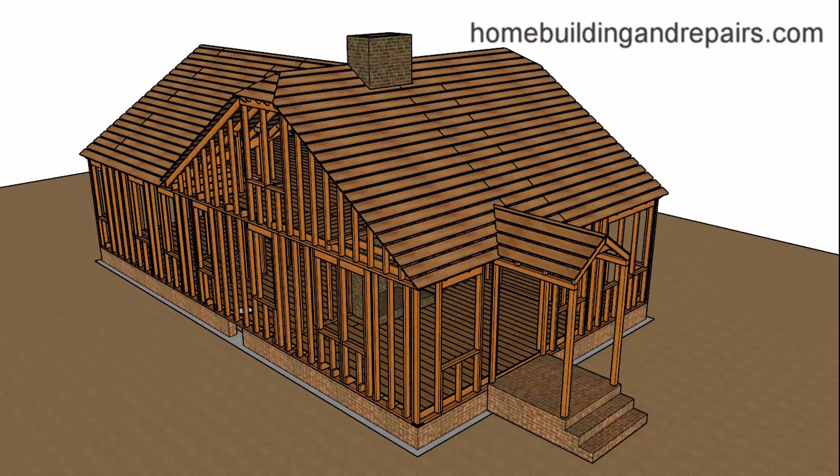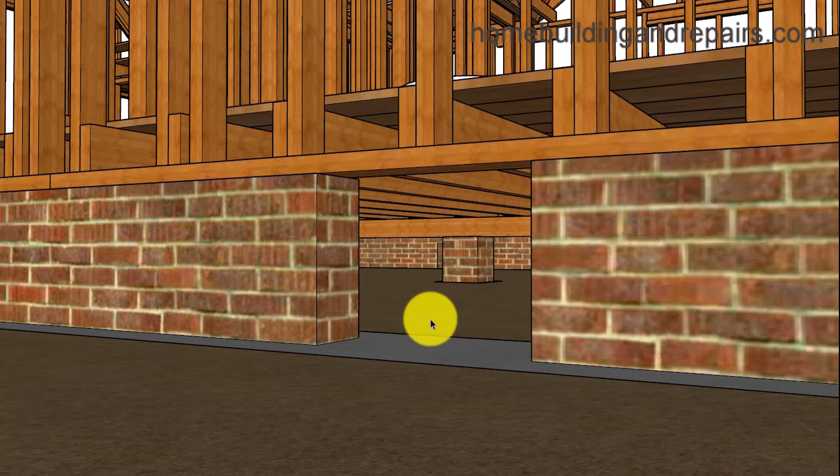In this video, I am going to provide some of you who do not like creepy things, you don't like going underneath your house to make any types of repairs, with a couple of other options that could actually speed up your repairs. However, it will require you to do one of two things to your house. And the first of those will be to install another crawl space access hole. And this might not be easy because you will need to go through the concrete, or you will need to remove the blocks or bricks.

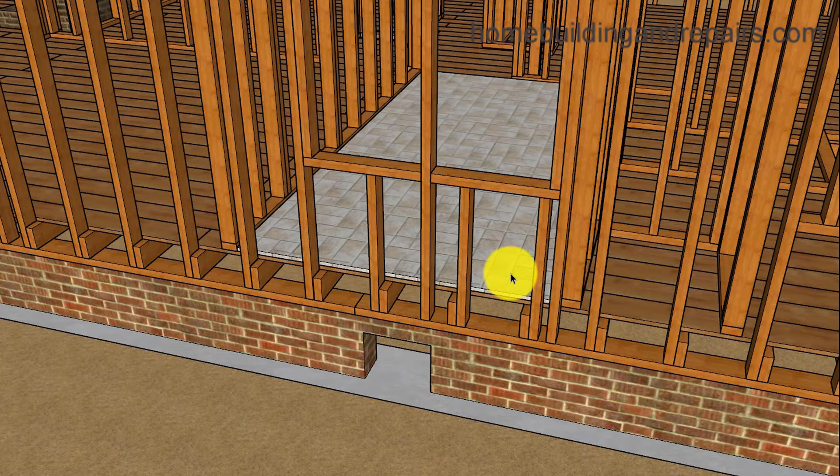So option 1 is not going to be as easy as option 2. However, option 1 might be your only choice if you have some type of flooring, tile, wood floor, anything that you will not be removing. And sometimes you can just pull the carpet up, or even some types of floating wood flooring, so that you can use option number 2, and that would be to cut a hole in the floor sheathing.

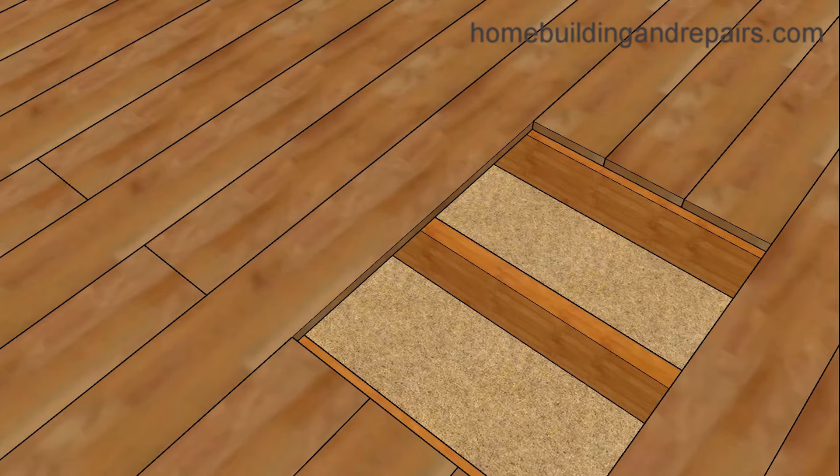And I know for some of you, you're like, I don't want to damage my house. And in some cases, you could actually damage the house if you don't put everything back together correctly. However, most of the time, you're not going to have a problem with that.

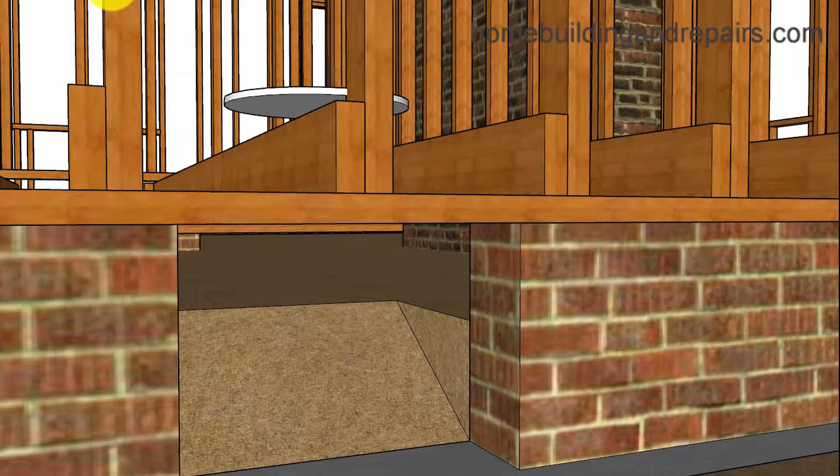Now, the second problem, and the reason why I've ended up doing this before when I needed to make repairs, would be the fact that you just don't have enough room in the crawl space area to get underneath the house or to get underneath the house safely. For example, you might only have a few inches. And of course, cutting a hole in the flooring might be your only option if this is the case.

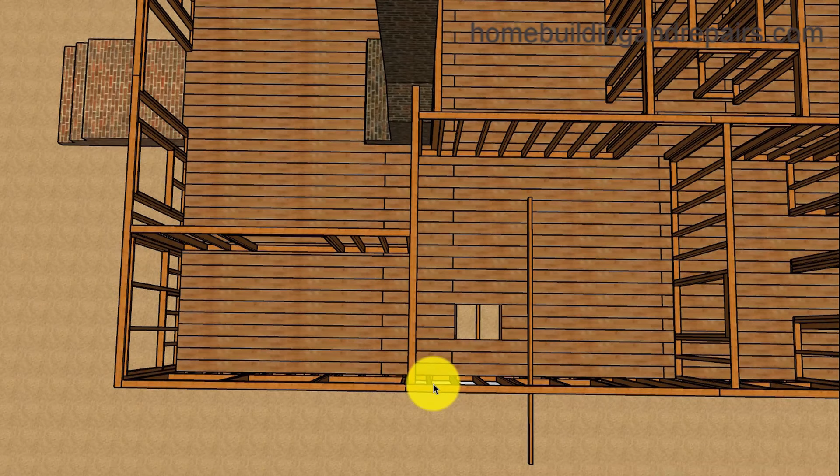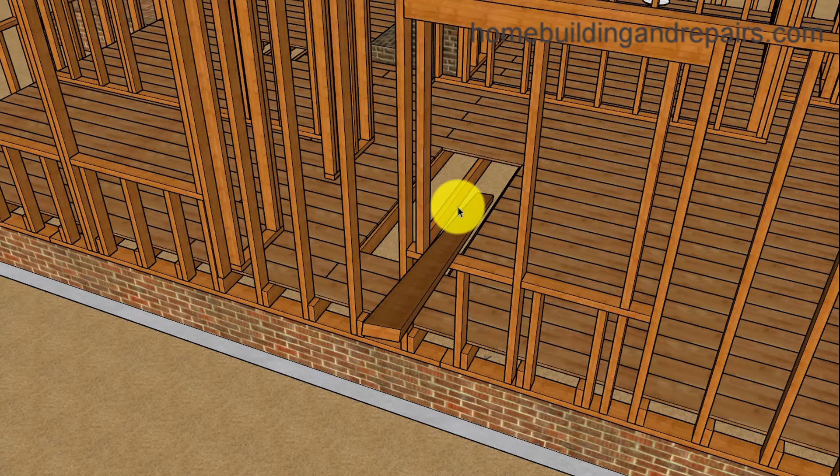So there are a few things that are going to provide you with a reason to cut a hole in a floor or to cut another hole, because you won't be able to get long enough lumber in through the access hole, or you might need to cut multiple holes or remove larger sections of the flooring, which brings us to another reason why you might choose to cut a hole in the flooring or another access hole into the foundation. And of course, something else you do need to consider when doing something like this is whether or not you're going to actually be able to get the lumber through a window or a door opening without something else becoming a problem or another obstacle that will prevent this from happening.

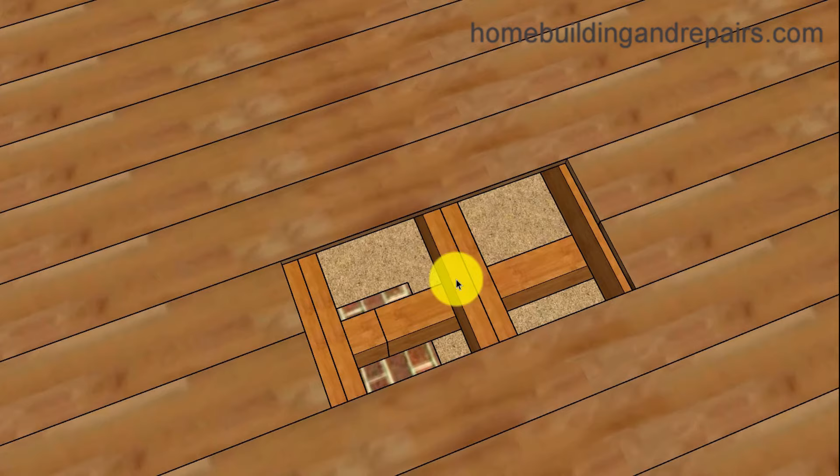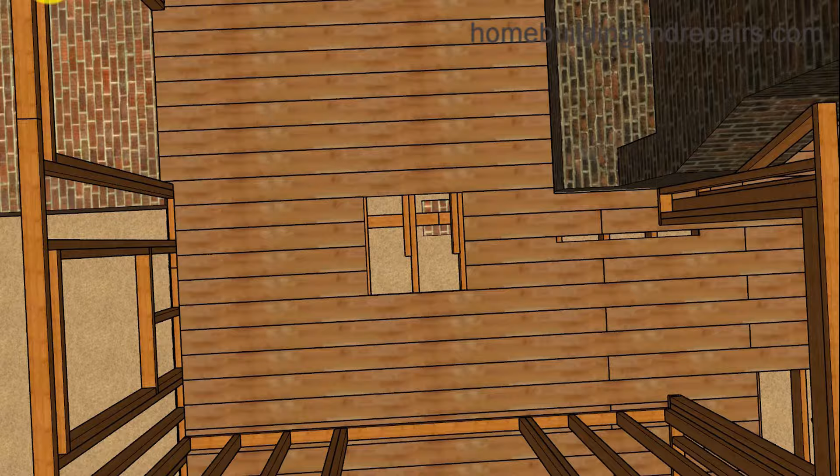And yes, this is something I have dealt with myself before, thinking that I was going to be able to get some lumber through one hole and ended up cutting another hole in the floor. Since I couldn't crawl underneath the house, I had to guess at where the hole was going to be cut and ended up cutting it in the wrong spot. So again, another problem I hope you don't run into, because the height of the soil, the position of all of the framing members, concrete footings, posts, and yes, even possibly a fireplace could become an obstacle that you need to concern yourself with.

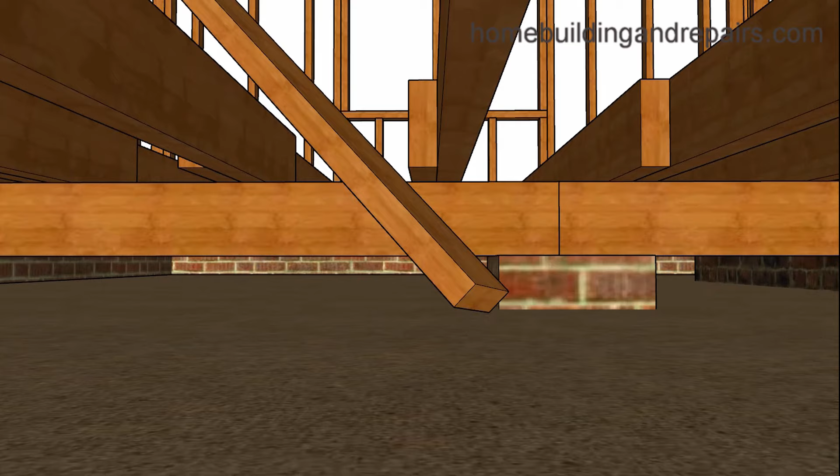And for those of you who might not understand what I'm talking about, let's just go ahead and take a 2x6 12-footer and show you how even if we can get it through a door, we might not be able to get it through the floor if the soil isn't deep enough, or if the joist spacing isn't far enough apart. We might have blocking in there somewhere to create a problem. And hopefully by showing you this part of the video, I will save some of you from the frustration of cutting a hole in a floor to only find out later that it's not going to provide you with what you hoped it would.

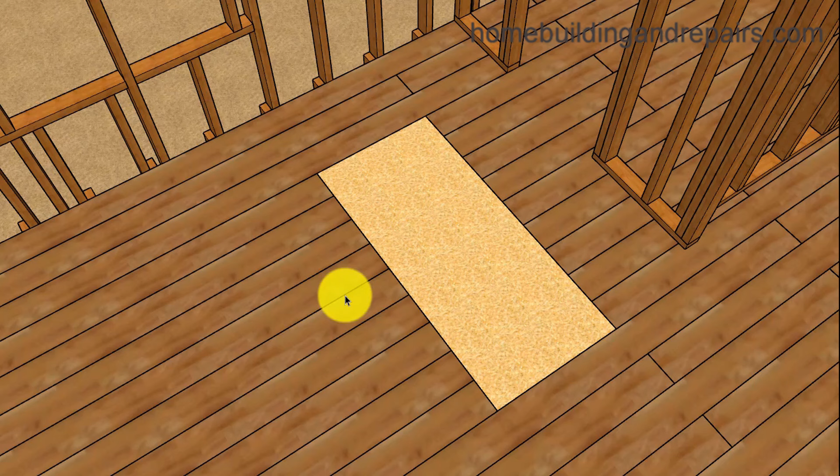And of course, after you are done, you can simply cut some new boards and reinstall them with nails or screws. I know a lot of people are using screws today, but don't forget that engineers still require nails to attach most of the wood sheathing to wood framing members, even though I don't think it'll be the end of the world or that your house will fall down if you do something like that. And again, the key word here is I don't think, which means I don't know for a fact. So you might just want to use nails unless you're planning on using this as an access hole again. Then screws are going to be awesome, because you will be able to remove the screws and open up the access hole again.

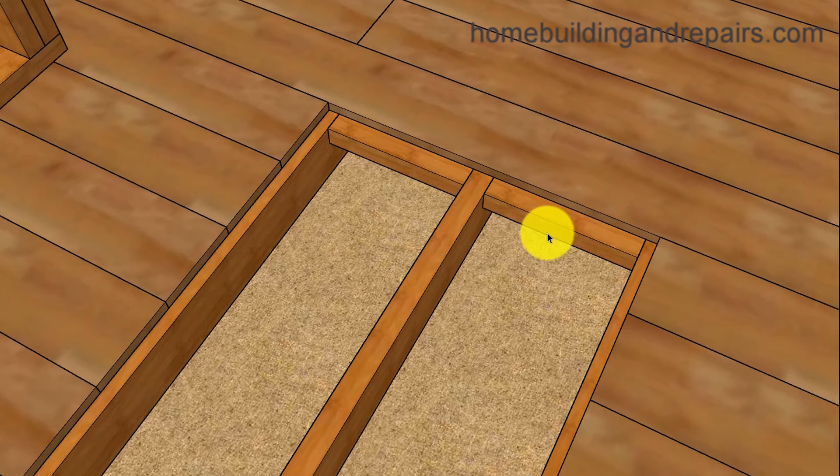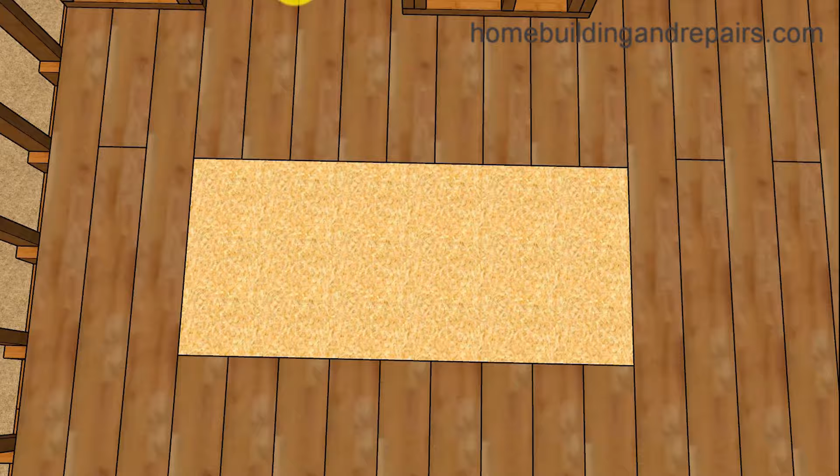Now, another thing I would suggest if you're going to be using plywood or OSB would be to block the perimeter. Make sure that there are blocks going all the way around the opening that you have opened up. Otherwise, you could end up with a weak floor, especially in the spot where the plywood or the OSB is. And if I have done my job reasonably well, you now have, as a do-it-yourselfer, carpenter, carpenter's apprentice, or somebody who has never even thought about this, something else that could help you solve a problem and either help yourself or help your clients.